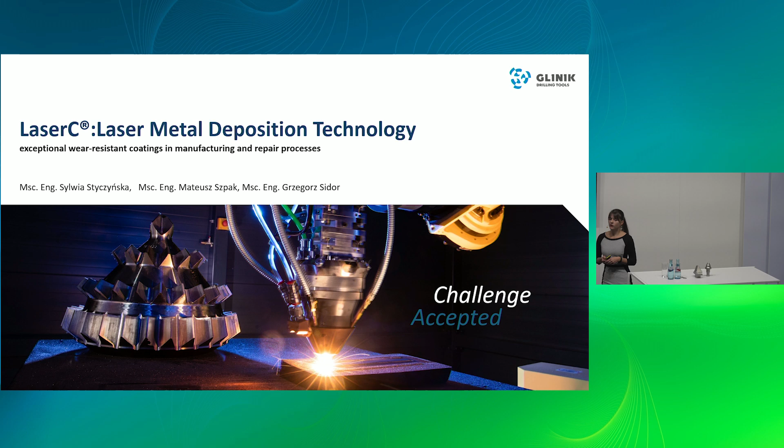Glinik company has been on the market for more than 140 years. Everything started in 1883 when Canadian and Austrian businessmen opened an oil refinery and a tool workshop. This refinery soon became one of the most prospective in the area, and the tool workshop became a factory of tools.

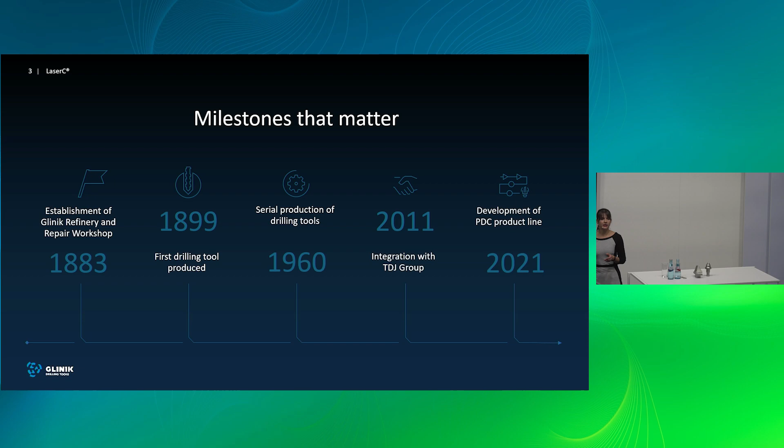In 1899, they produced their first drilling tool. After some time, because of wars, in the 1960s they started serial production of drilling tools. From this time, they began to produce more and more different tools. After some time, in 2011, they integrated with TDJ Group, and from this time the new company strategy and new image pushed their products to enter international markets. The last recent milestone was in 2021, when the first PDC product line was produced.

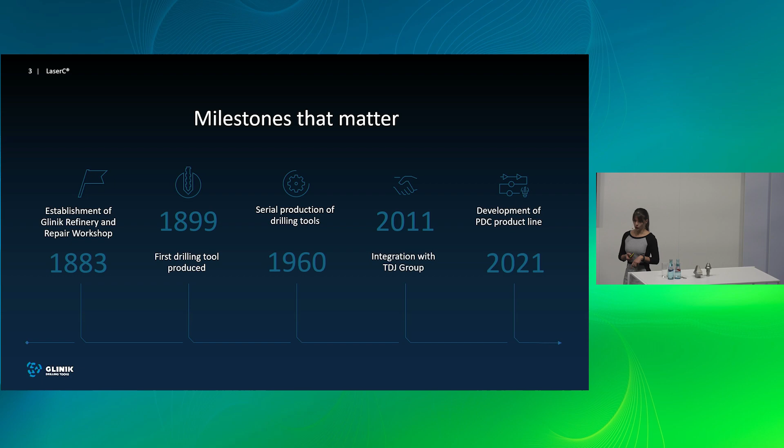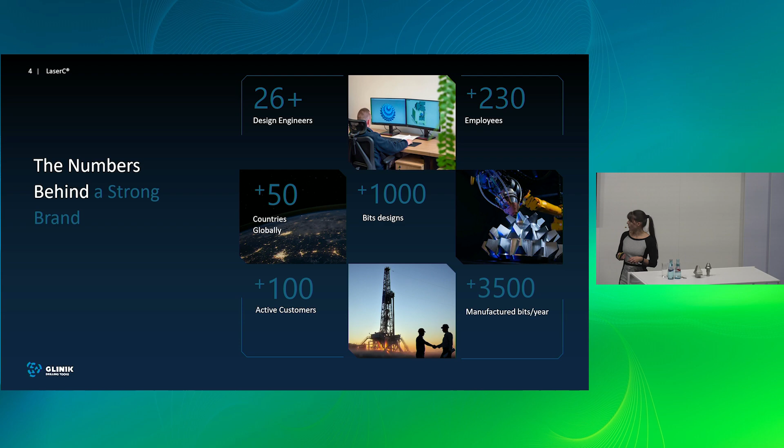Glinik company employs more than 230 workers, including more than 26 design engineers. They produce more than 3,500 bits per year, using more than 1,000 customized designs. More than 90% of products are exported, sent to more than 50 countries around the world. Glinik company also cooperates actively with more than 100 companies.

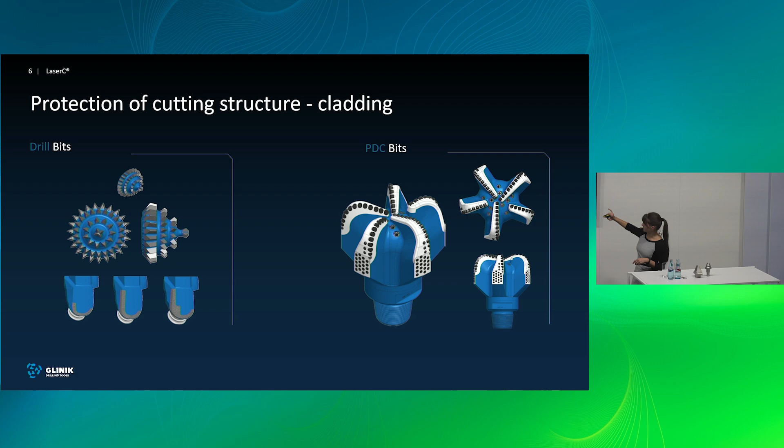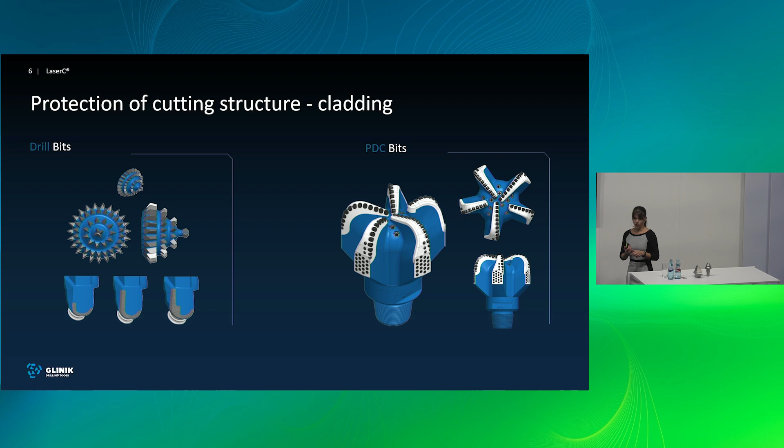And for PDC bits, these blades are marked by gray color here on this graph. So it's really important to implement new technology, to find new material which can provide better mechanical properties, so these critical parts will be protected even more. Also, the second important thing here is to automate this process. Because of that, we can reduce production time, reduce cost, and achieve better drilling properties.

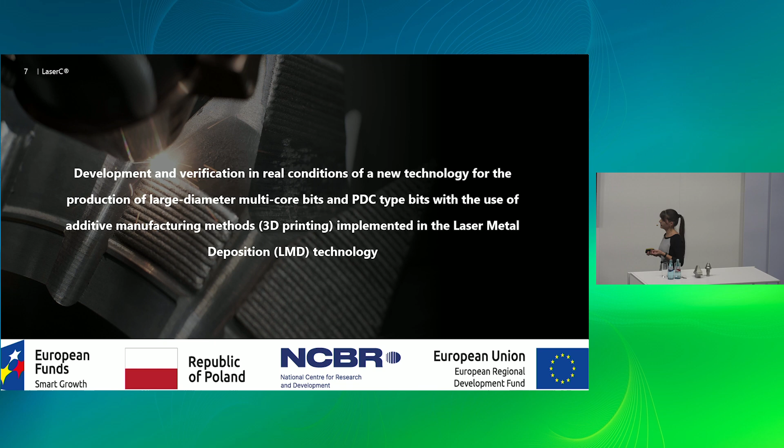So Glinik company actively carries out research to find new solutions for these problems. Because of that, together with the National Center for Research and Development and some universities from Poland, like Warsaw University of Technology and Silesian University of Technology, they applied for a project entitled: Development and Verification in Real Conditions of a New Technology for the Production of Large Diameter Multi-Cone Bits and PDC Type Bits, with the use of additive manufacturing methods implemented in laser metal deposition technology.

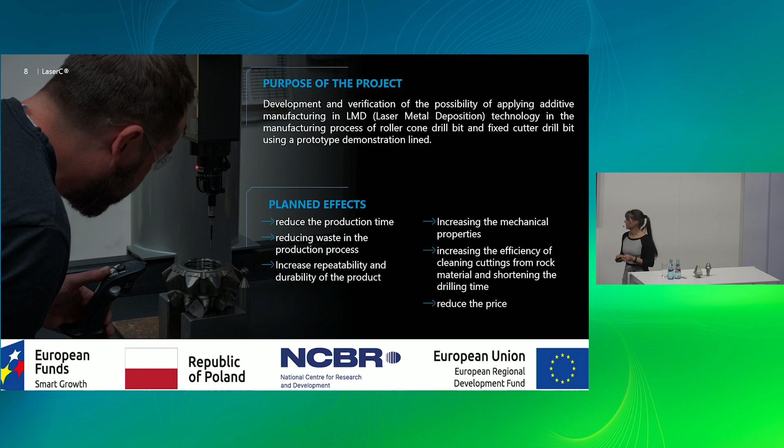The main aim of this project was the development and verification of the possibility of using laser metal deposition technology in manufacturing of roller cone bits and PDC bits. The expected results were reduction of production time, reduction of waste during production, mainly waste of metallic powder used during production, increased repeatability and durability of our tools, increased mechanical properties of these overlays, increased efficiency of cleaning cuttings during operation, and of course, reduced price.

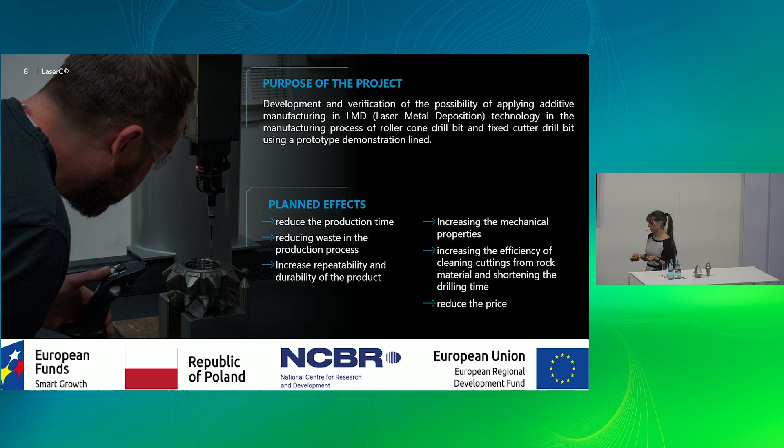But what is laser metal deposition? I'm pretty sure it was explained in more detail at some other stage, but briefly: this laser metal deposition technology is an additive manufacturing technology where the laser beam is focused on the surface of the metal object. There is a melting pool in which the metal powder is injected, and this powder can be melted and solidify rapidly.

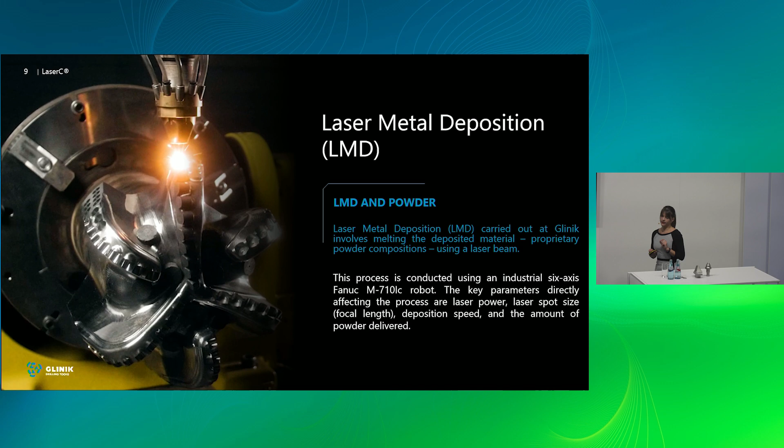So maybe now let's watch a short video about our LaserC technology from Glinik company.

There is no sound here, I think, but it's not relevant in this video. So let's look.

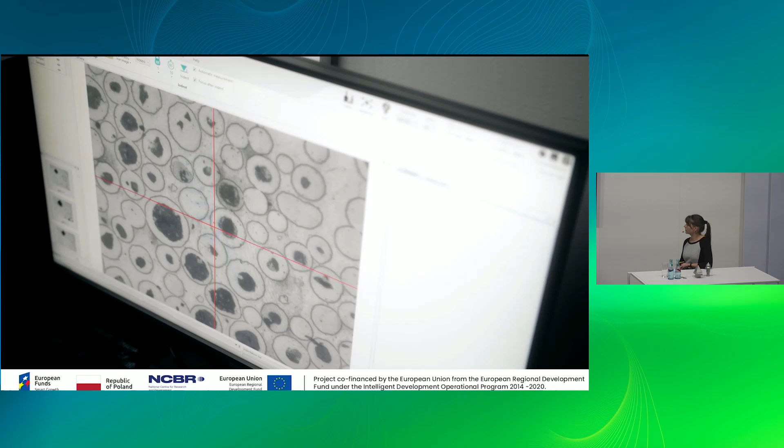I will talk more about the advantages of this process later in this presentation, but now I want to say a few words about some achievements. Based on the results of this project, our trademark was registered this May in the European Union, the LaserC trademark. We are also working on registering this trademark in the USA and Saudi Arabia. Three patent applications are also pending.

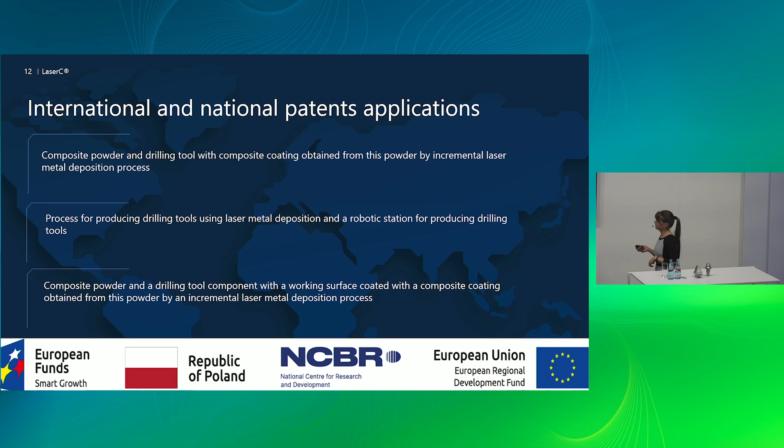Now let's take a closer look at the results of this project and the advantages of LaserC technology. First of all, LaserC technology provides high density of energy, and because of that, it is possible to melt and solidify the injected metal powder very rapidly. This results in a fine-grained microstructure, uniform distribution of particles, and importantly, these particles are not degraded.

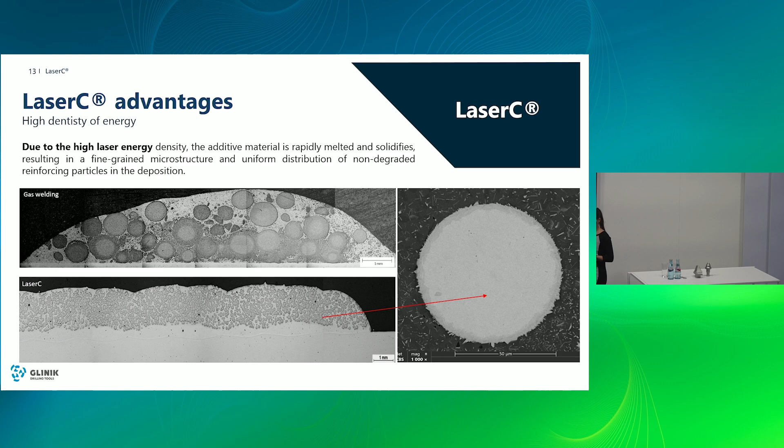The next advantage is low heat input of this technology, so it is possible to surface elements with narrow cross sections. There is also a small contribution of the substrate material, so the combination of materials from the substrate and overlay is less.

and also the heat affected zone is minimized. So here you can compare the quality of the overlays on this complicated geometry of a roller cone bit with the standard method, gas welding. And if you want to look closer, you can even touch it or look how it looks.

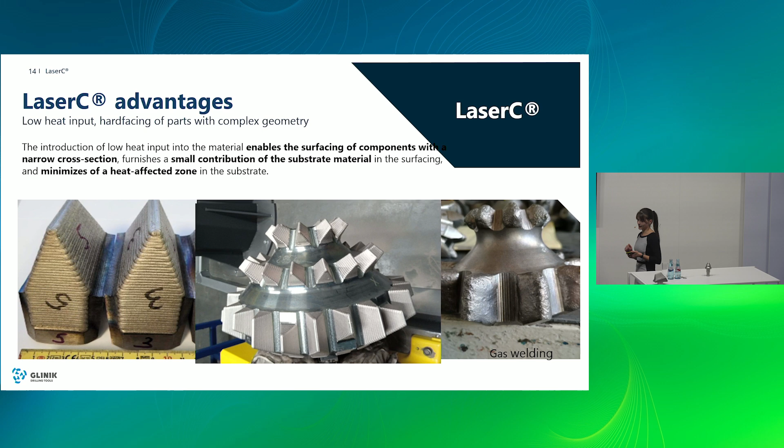Maybe after the presentation you can look closely how it looks. What is also important here is that to overlay this complicated geometry is possible not only because we have low heat input, but also because of our special construction of industrial robot and some other machinery next to this.

So, because of these two really important features, high density of laser energy and low heat input, these effects on microstructure give us a fine-grained microstructure, uniform distribution of reinforcing particles, there is limited mixing of substrate and layer materials, and the heat-affected zone is minimized.

And these microstructure features affect mechanical properties. The two most important mechanical properties are abrasive wear resistance and impact resistance. When you compare it, you can see that these mechanical properties are at least 2 times higher when comparing LaserC technology and gas welding, the standard technology.

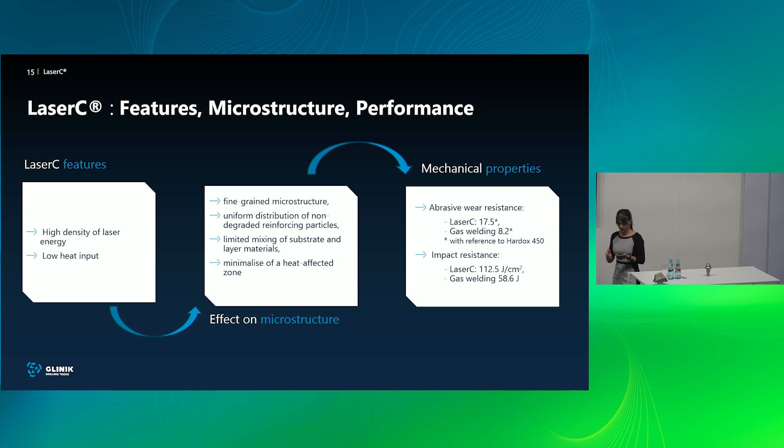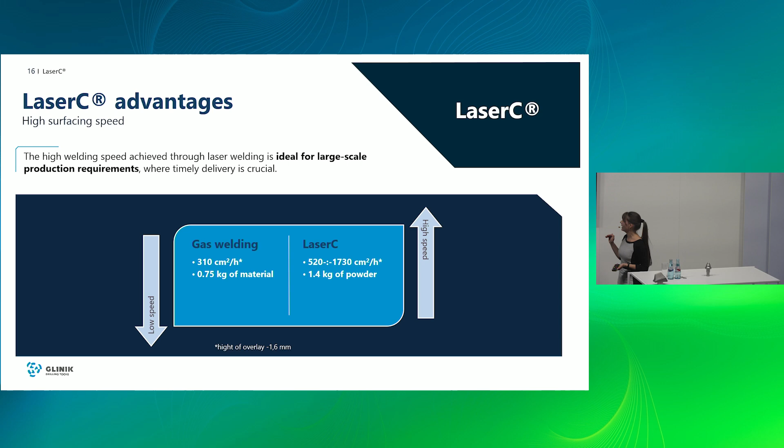The next advantage is high surfacing speed. LaserC technology provides 2 to 6 times higher surfacing speed compared to gas welding, and it makes this technology ideal for large-scale production.

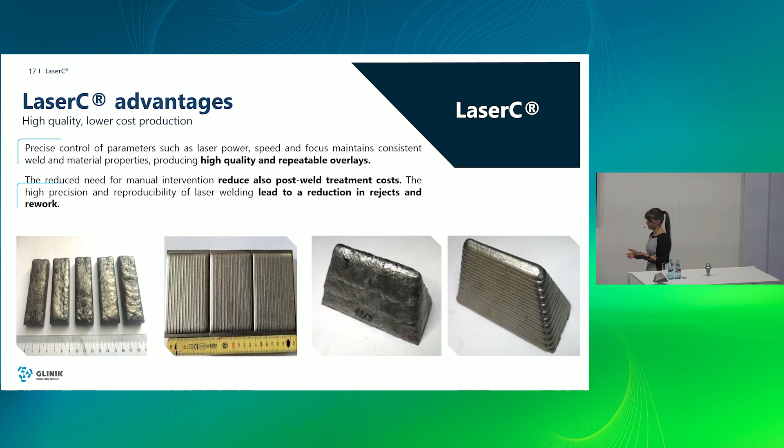I mentioned before about the high quality of these overlays, but there is also another advantage from this. When we have our overlays with high quality, our process is repeatable, and it reduces the need for post-weld treatment, so it also leads to reduction of rejects and reworks, meaning this process is cheaper. And the next one is automation of this process.

And it is really important to highlight here that we are the first company in the oil and gas industry which automated this process, meaning overlays or surfacing these working surfaces of roller cone and PDC bits.

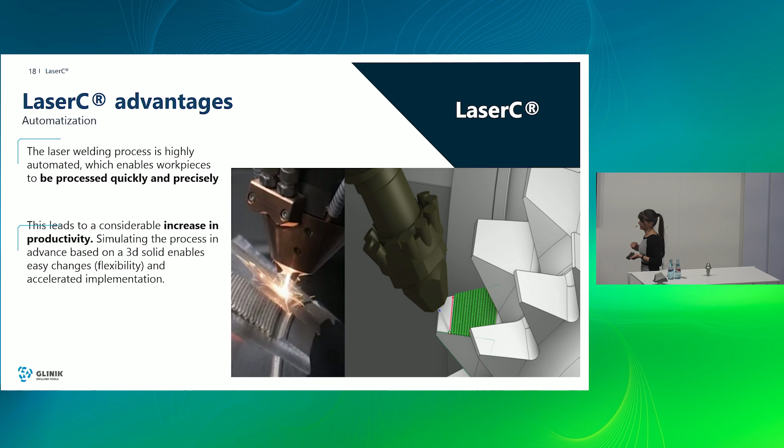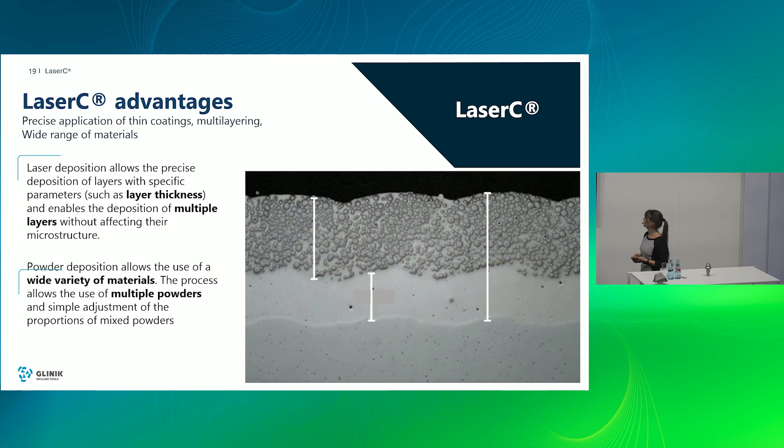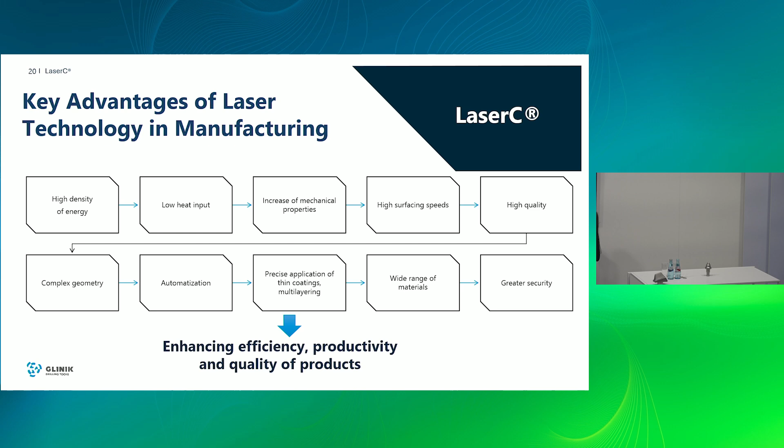So these are the key advantages of LaserC technology: enhancing the efficiency, productivity, and quality of our products.

This technology was successfully implemented for hard-facing roller cone drilling tools, roller cone bits and PDC bits, together drilling tools, with really higher and improved abrasion resistance and impact resistance. And the tests which were carried out onshore and offshore with some other companies exceeded our greatest expectations.

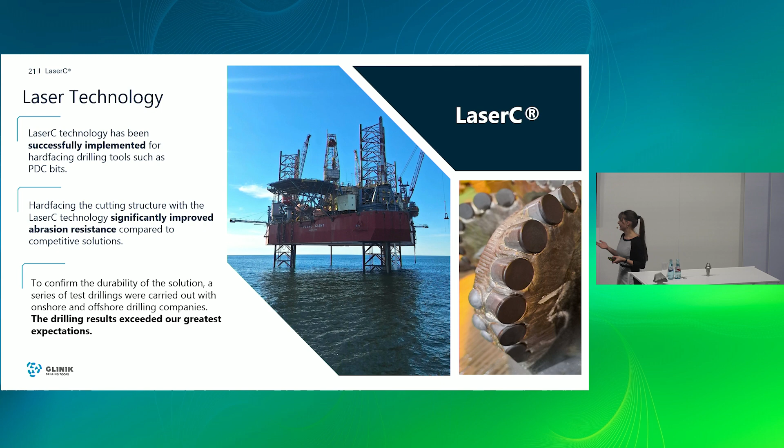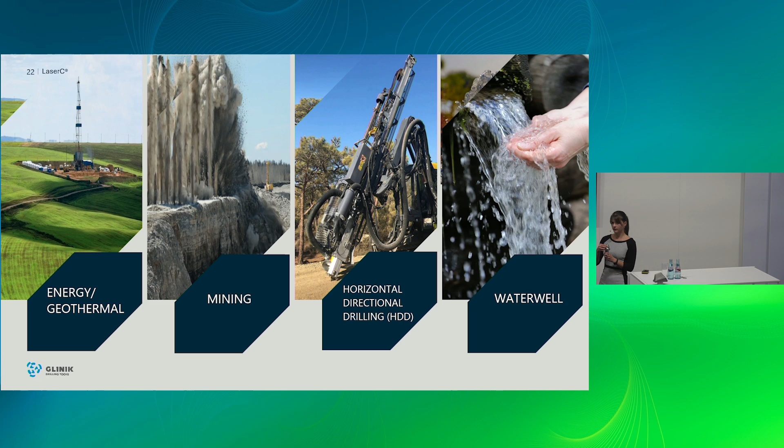What's more, we want to apply the results of this project not only to the oil and gas industry, but also to other industries like geothermal energy, mining, horizontal directional drilling, and water well industry. To prove that, I can show you a rotary tangential knife for mining combined with the overlays created using this LaserC technology.